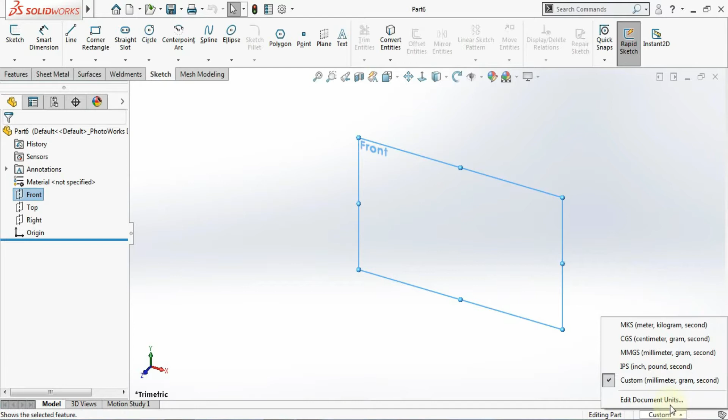Just we have to draw something, so I'll draw a basic sketch. Take a front plane. Before that, I'll define the unit. Take a plane and let's start the sketch. I'll take the lines and draw a random sketch, something like this.

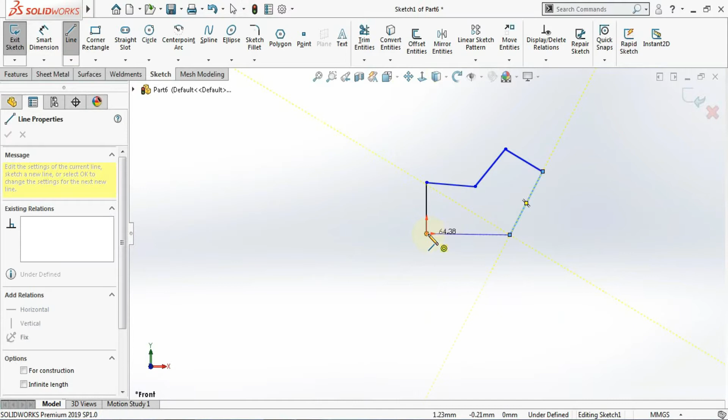You can see here, this is my sketch. So I'll just give some relations, geometric relations.

In parametric modeling there are two types of constraints. One is dimensional constraint, which we can measure, like length, radius, diameter, angles. Apart from this, there's geometric constraints, which you give in terms of relations like concentricity, perpendicularity, parallel, vertical, horizontal, coincident, etc.

So I'll do something here. I'll select the lines, and I'll make the lines horizontal, and I'll make this line horizontal.

Now I'll be giving dimensions. If you go into dimensions, you'll have a lot of options, like smart dimensions. Smart dimension is the most used, and horizontal and vertical are used only to give horizontal dimensions and vertical dimensions. First I will start with horizontal and vertical.

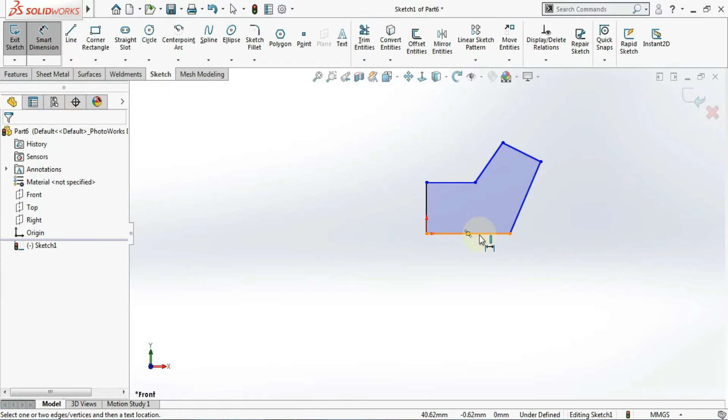So you can click on horizontal. Now you can see this is my horizontal line. This dimension is only applicable to the horizontal line. By using this, you can give the dimension in the horizontal lines, and you can give the value also. Let's change it into 25. You can see I've selected horizontal, but I'm not able to give the dimension to this vertical line, so I'll change it into vertical.

Click on the vertical lines. Now you see it's giving you the vertical dimension, and I'll give it a value like 15.

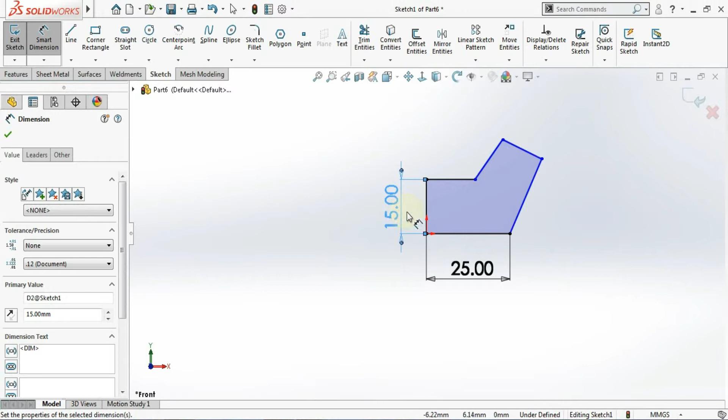Doesn't matter. Now I want to give some dimensions here for the inclined lines. By using this you cannot give it, but if you use smart dimensions, you can give any kind of dimension - horizontal, vertical, align, angle dimensions, radius, diameter, everything - by using the smart dimension. So let's move on to smart dimensions.

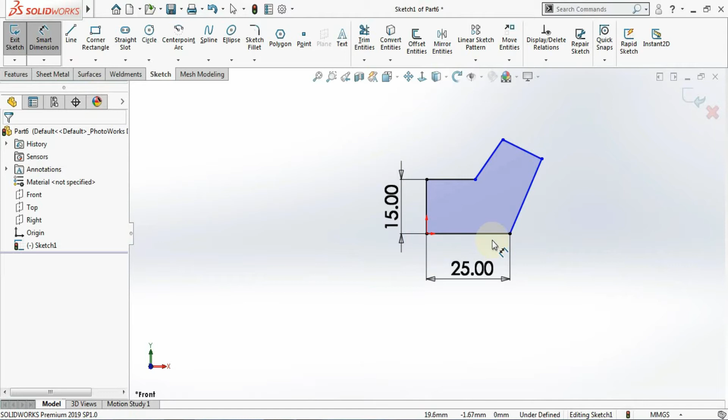Suppose I want to give the angle over here. For giving angular dimensions, you need to click on this line, with respect to this horizontal. Now it's giving you the length, but I want to give the angle, so click on this line once again. Now you can see it's giving the angle 114.

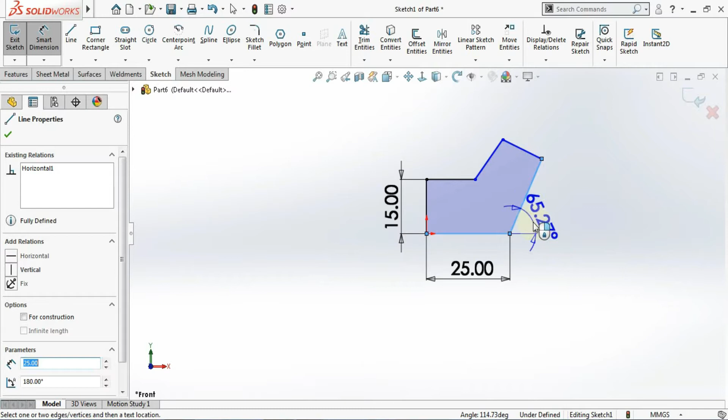Now which angle do you want to give? If you want this angle, click outside. If you want this total angle, give it outside. You can even give this side angle, but I want this one, so I'll click inside. Now I'll give the value 125.

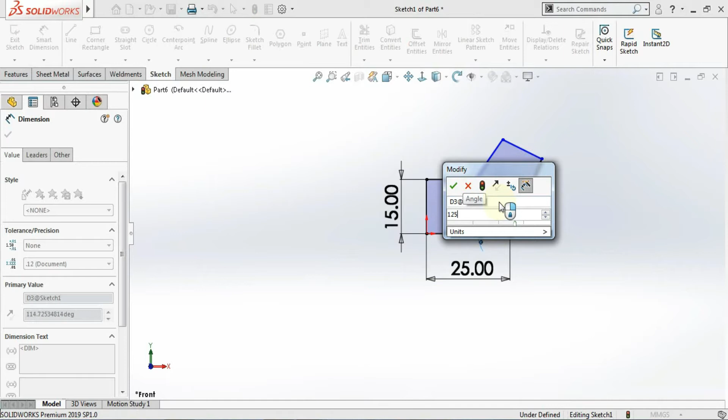Let's see. Now you can see these two lines are still not fully defined because degree of freedom is still there. So for that, I'll give a relation between this and this. For giving relations, you need to select the lines - actually, both lines.

For multiple selections, first select the line, hold the control key, and select the second line. Now you can see it will show you the most possible relations you can give. So I'll give here parallel. Now I'll give this line and this line a perpendicular relation.

So select the line, hold control key, and select this one. Now I'll give the relation perpendicular. Just go with this, okay. Then it's still not fully defined, so I'll give one more dimension from here to here.

Now I'm giving here the value, something like, okay, let it be 40. I'm giving here 40, doesn't matter. You can see the reason the line is not fully defined.

So for that, you can give one more dimension anywhere, like I'm giving the distance from here to here. Now you can see your line will get fully defined. I'll give here 15. So this is how to give the dimensions using smart dimensions.

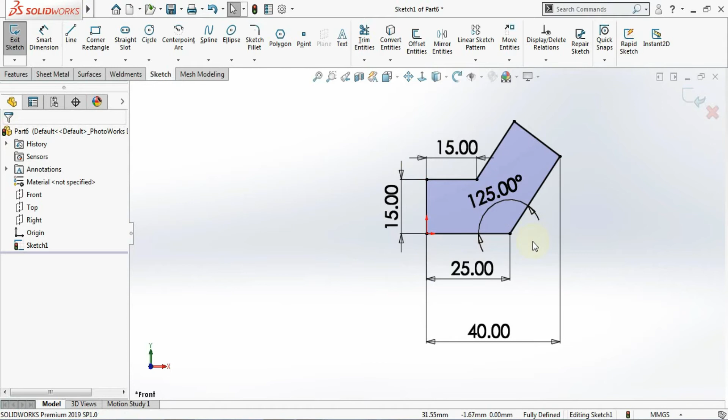I'll draw something where we have something circular. Okay, let me draw some center point arc. I'll just go with this center point arc. I'll start from this point. Okay, the line is on your screen. The dotted line is called an inference line in SolidWorks.

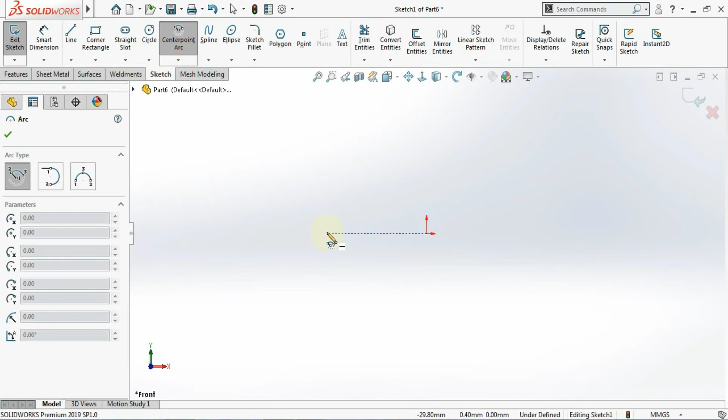I've done one arc here and I'll be drawing one more arc on the opposite side, or else we can do the mirror also, but we haven't learned the mirror command yet, so I'll not go for that right now. So I'll just draw one more arc on the opposite side, which will be quite like this.

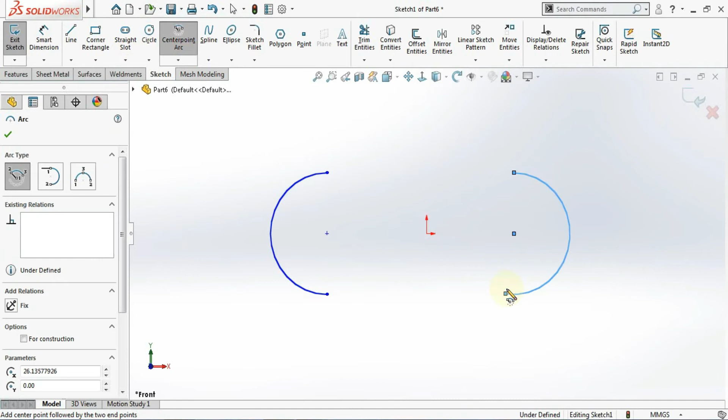Now I want to give the dimensions. You can see here, if it is an arc, by default it will give you the radius, and if it is a circle it will give you the diameter. But don't worry, if you want you can change it. You need to click on this leader.

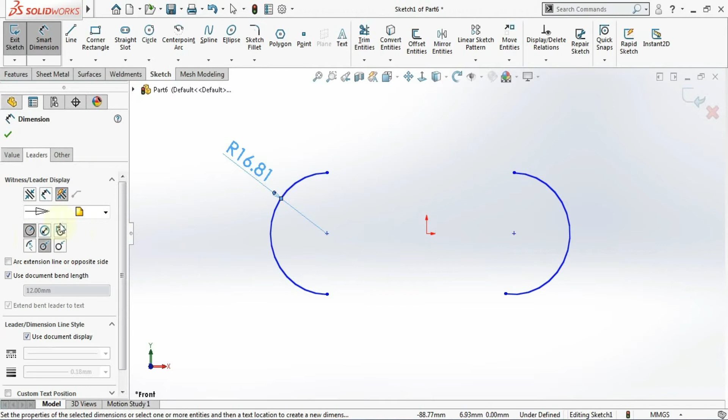You can see here everything we can change. Even we can change this also. The arrow is coming now, we can change the arrow also, like this. Even we can change it into diameter, but it's better to give the radius only because it's an arc. Just go with this.

Okay, now I want to give the dimension from here to here, the distance between these two. So what is happening here, it's coming like this. Just undo this. So I'll click on this arc and I'll click on this arc. It's giving the center to center distance, but my requirement is the overall distance.

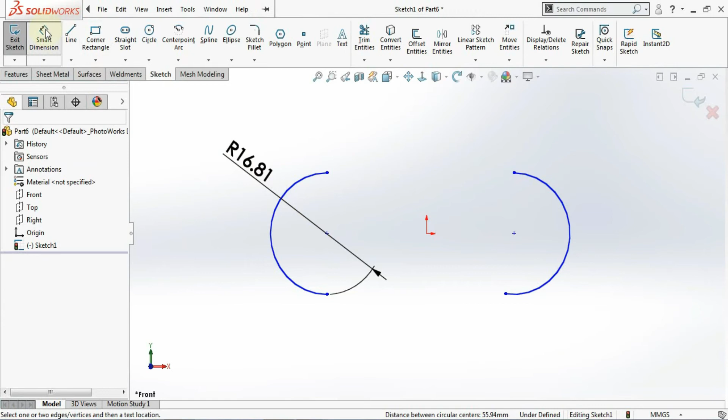So for that, what you need to do is just come out from this, click on the smart dimension only, select this arc, hold the shift key and click on the other arc. You can see this is how you can give the distance between two arcs.

Now I'll be moving into other options. Let me remove everything. Now you can see you have other options here, ordinate dimensions. You have horizontal ordinate and vertical ordinate. I'm not going for the horizontal and vertical. As you have seen with the smart dimension and horizontal and vertical, if you know the smart dimension, you don't need to go for horizontal and vertical.

Horizontal is applicable for horizontal only, and vertical is applicable for vertical dimensions. In the same way, horizontal ordinate is for horizontal ordinate dimensions, and vertical ordinate for vertical. But if you know the ordinate dimension, you can give both kinds of dimensions. So let me create some geometry where I'll apply the ordinate dimensions. I'll take a line and create a structure with some steps.

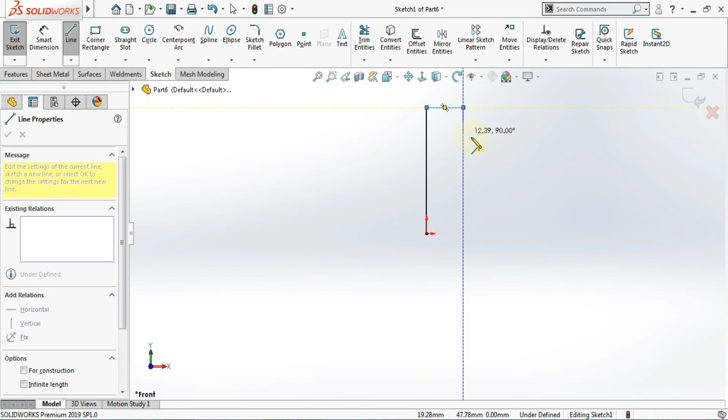Okay, click over here, so 2 steps, 3, and 4 is enough. So let me complete this. Let it be. You can see whenever we draw any closed area, it's shown shaded. If you don't like this, you can turn it off also.

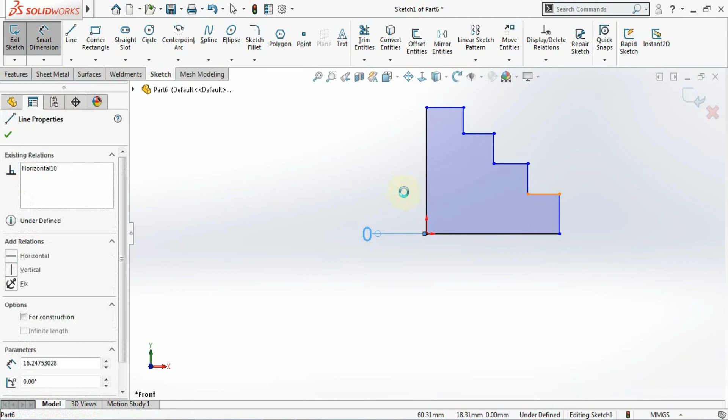Now I'll be going for the ordinate dimensions. Go to the dimensions and choose ordinate dimensions. You can see this is my ordinate zero, absolute point 0, 0. If you start from this point, I'm choosing this as my ordinate 0, and now you see what is happening. This is what we call ordinate dimension.

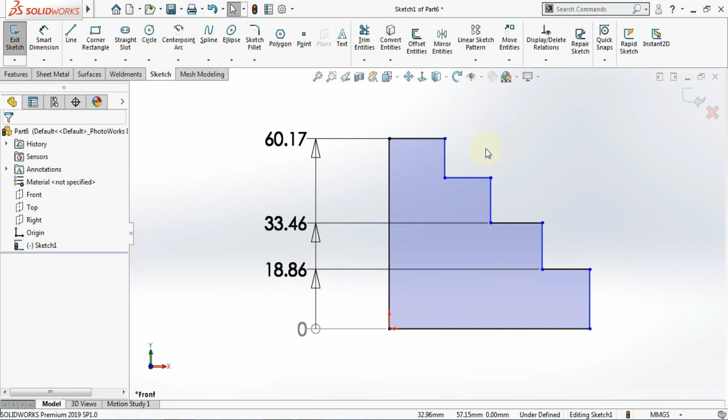Now you can see I have skipped one here. Why have I skipped it? I skipped this one intentionally to show you. Say I forgot to add the dimension to these lines. So how to add the dimension there? Right now I'm in ordinate dimension. If I click on this directly, it's also showing 0, which is wrong.

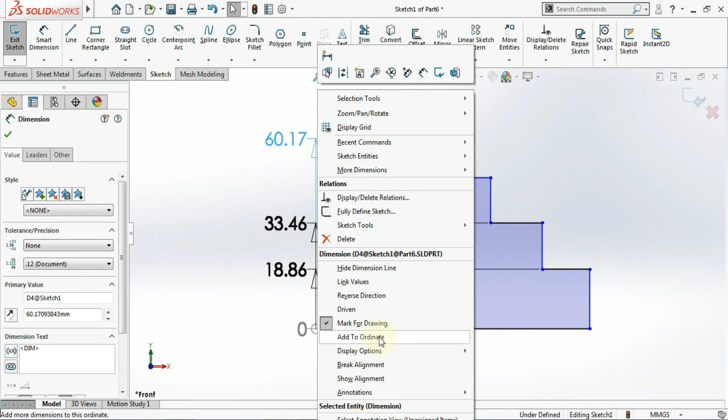To add dimensions to these lines, just right click on any one of these dimensions and you'll have the option add to ordinate. Click on this, then click on these lines. Now you can see the dimension has been added. So by using the ordinate dimension itself, you can give the vertical also.

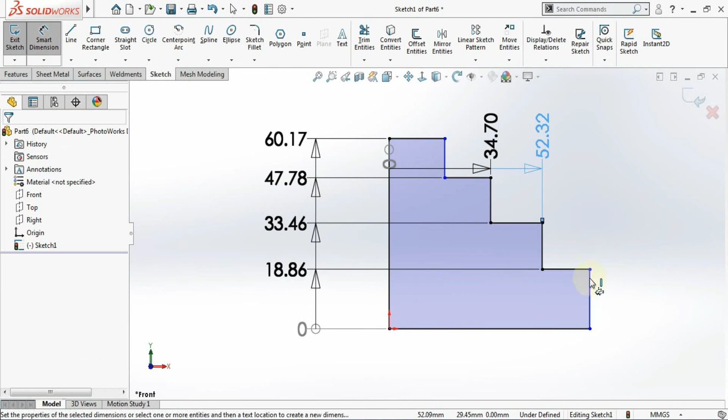I want to give the vertical right now, so select this, select this, select this, select this, select this. Now you can choose how you want to place the dimension. You can place it here also. I have skipped one, so you can try yourself how to place the dimension over there. So this is all about ordinate dimensions.

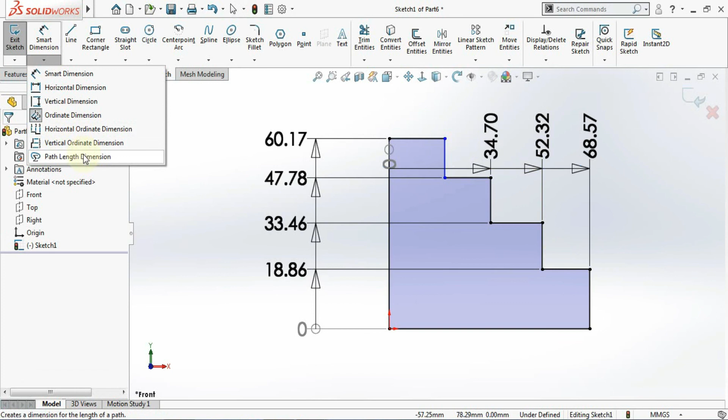These are all the same, only with this one you can add horizontally, and with this one only vertically. The last one is path length dimensions. Let me remove this. I'll create a simple rectangle to explain the path length dimensions. Now I want to create the dimensions here. This length is 200. I'll go to the options here, path length.

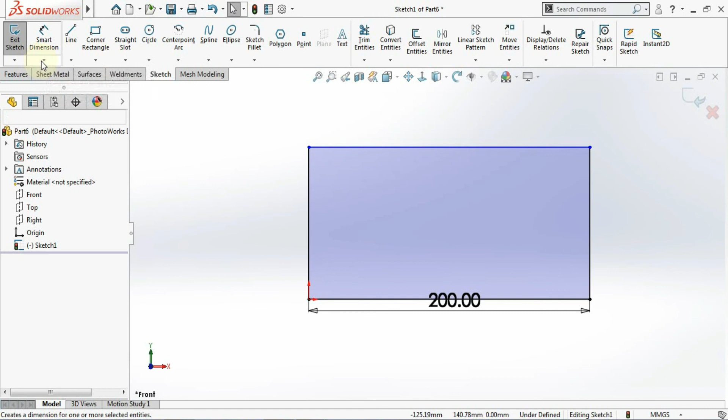Click on this and select the path. I'll select the entire geometry. Just go with this. Okay. Now you can see what it is telling. This is your path length. It's nothing but the perimeter. So this is all about the dimensions.